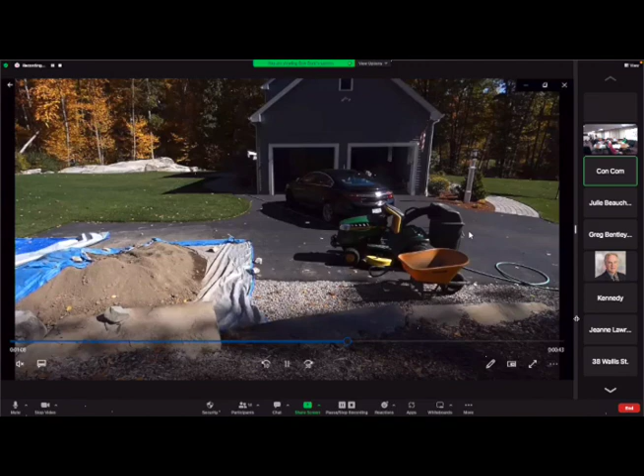I thought everything looked very well clean and neat and pretty much well established. Then I'm off the property, onto the other order of conditions on the left, and everything else is associated with this property here. So there's no variation in the plan, it's just that we were looking for more stuff to be done, and that stuff has been done now.

You have the trees, you planted the trees along the center line, very pretty. Some reground chips, a little riprap swell along the right hand side.

Any comments from the board? Looks good to me. So is that like another driveway that he was walking up, or what is it? Oh, okay. It's a double wide, it's like a boulevard. Yeah, it really is. The two-way, yeah.

They didn't want to share. They did not want to share, that's correct. Oh, okay. Didn't expect to be. Right.

All right, I'll entertain a motion to approve certificate of compliance.

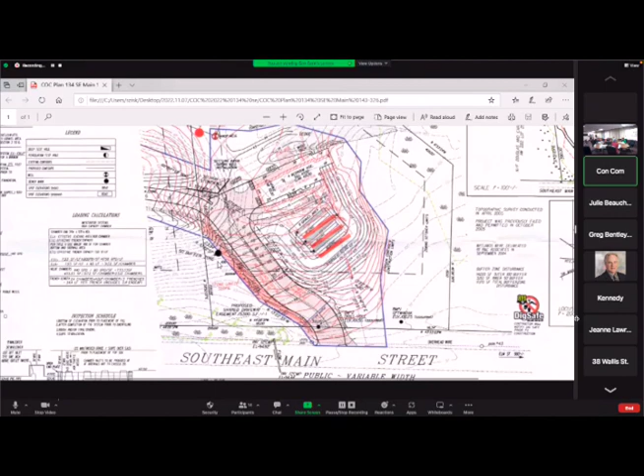So the propane tank though, the propane tank is shown to be on this property. And that is beyond what was, I think, proposed as the construction limits. It is outside the construction limits. They just plopped it there.

Which, you know, is still outside of 50 feet, it looks like. So not a really big deal, but... Yeah, and I couldn't remember whether we discussed that last time we looked at this plan or not.

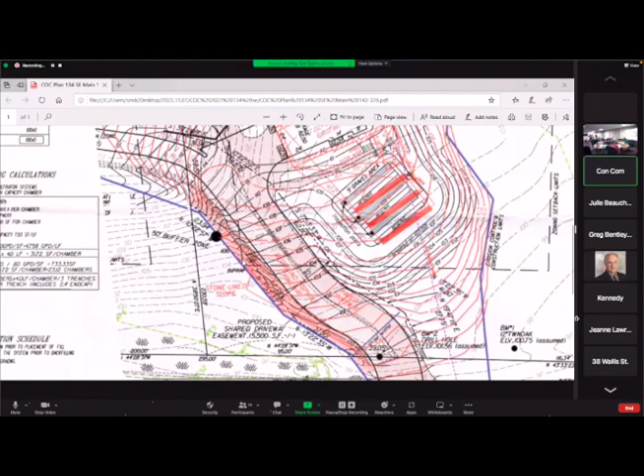But the driveway looks good, so. I'm fine with it. Looks fine with it, good. I'm fine with it. No, it's worth asking, absolutely.

Continuing to entertain a motion. I move that we approve the certificate of compliance request for 134 Southeast Main Street.

Motion made by Mark, seconded by Mike. Roll call vote. Eric Harris, aye. Joe Fitzpatrick, aye. Mike Greco, aye. Mark Mangum, aye. All right, thank you.

Next item 7 is request for certificate of compliance for 149 Southeast Main Street, Dave McKenzie. Is there someone representing that address? Excellent, yes it is, thank you.

Is this good right here? Beautiful. Okay.

For the record, Margaret Bacon, Civil Site Engineering, requesting a certificate of compliance for a wetland crossing for our client, Mr. McKenzie, at 149 Southeast Main Street. I don't know if the board had a chance to get out there and take a look at this, or Steve, you want to bring up a video?

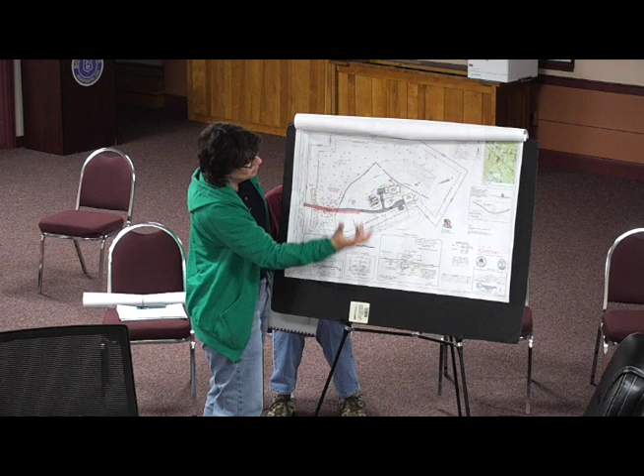Yeah, sure. Okay, so basically, this was a wetland crossing we did a couple years ago. Site is stable, everything was installed pretty much exactly how it's supposed to be. Culverts, elevation and location, dead on. The replication area is growing and seems to be thriving. Here in red is the as-built driveway, and then there was the proposed driveway. The area up here is outside of the buffer zone, but the house is pretty much as designed.

And then the two replication areas. Actually, I had to replicate 2,400 square feet. So instead of disturbing a whole big area, I tried to keep the disturbance adjacent to the driveway. I kind of split it into part here and then another smaller replication over on this side.

When was it planted? Over 2 years ago. And the plant material looks good? Oh, absolutely. Actually, I did all the planting several years ago. Usually about 50% of those plants will survive, but what you really want is the native plants to come in, and a lot of the plants we planted are coming in quite healthy, including some arrowwood and winterberry.

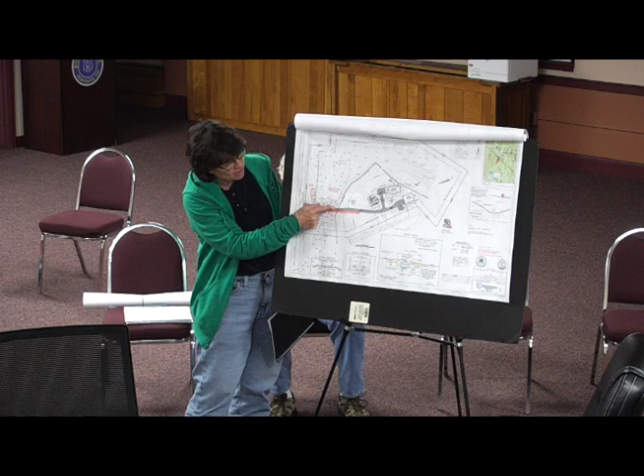But what we also did on this driveway crossing is, instead of doing 2-to-1 slopes with rock or walls, we vegetated it. We used a lot of willow tubelings - I don't know if you've ever seen those, they just insert the willows in, and did a lot of willow plantings along the slopes. We also included a wetland hydro seed mix. I have some pictures in this report, and that stabilizes the slope instead of using a hard rock retaining wall and riprap. They're beautiful, actually. First time I used those tubelings, I was quite impressed, so I've got a couple other jobs in the works doing the same thing.

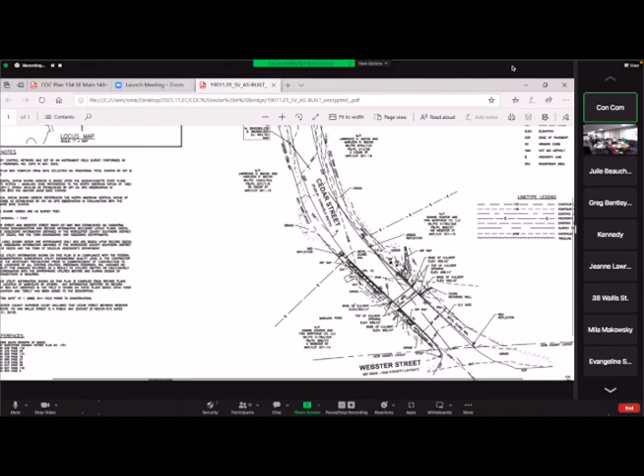Guess we have to approve it then. The file name says it's the as-built. You sure you're not in black and white? Can you see it on the screen? Yes, that is the thing that I am looking at.

Look at you. Jim, are you there? I'm relatively certain that Jim is not here. I see him on the Zoom. Oh. Apologies, he's muted.

He is up there, come on Jim. Does Jim know, is he up there? Yeah, I see him. Can you hear me now? Yes. I apologize, every time I use Zoom, the first time I log on, nobody can hear me. I have to log off and log back on, and I apologize for that.

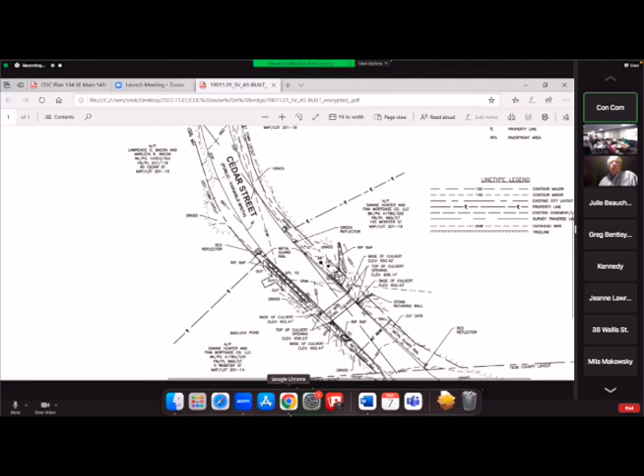Do you want to talk about the bridge and the asphalt, any variances? Yeah, I did hear the first part of that conversation. The contractor was installing 4 bounds, and there's 3 punch list items, none of which entail working outside the bridge. So those are the people you probably saw, the surveyors installing the bounds along the layout.

We're having the contractor also install washers on the guardrail that goes across the bridge, so that's probably some of the work you've seen. And there's a couple of signs further on north that they have to adjust. So those are the 3 punch list items, and I'm sure that's what they were out there for.

Yeah, other than that, the bridge is now complete. They did great work out there, and we're requesting the certificate of compliance. We did have the original order of conditions.

490 square feet of temporary wetland impact that, if you've been out there, the wetland species, especially on the west side, they're starting to, they're growing. The northwest side has really good vegetation.

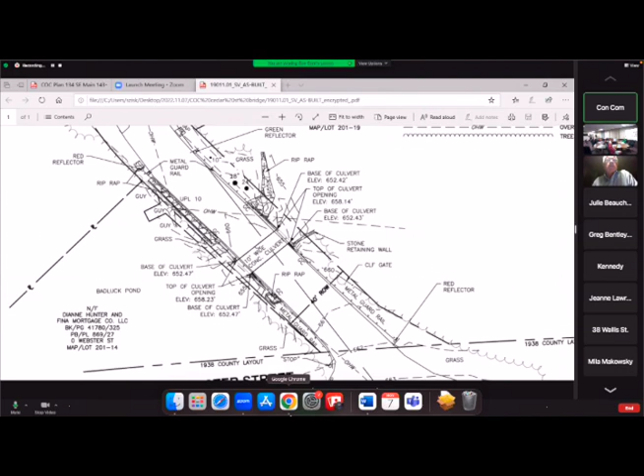The southwest side is coming in too, and then the other side. Did you have a video on? Is my video coming up on this at all? No, we just see the plan, a black and white plan. For some reason the videos will not... I had a few pictures, but with my ability on Zoom, it's hard enough to get the audio to work. The videos, it's not having me share any videos tonight. Let's see if I can try it one more time.

You're getting it, is this video coming up? Yes, yep, okay, oh very nice. Jim, can you see the video at all? I can, yes, all right.

I think the replication temporary is on the other side, right, Jim? No, it was on this side, yeah, this is the northwest side. I had pictures from a couple of months ago from September which showed it really filling in green and all. It was on the northwest and the southwest side, so the sides you were just on. This side here, we just had the bank of the river.

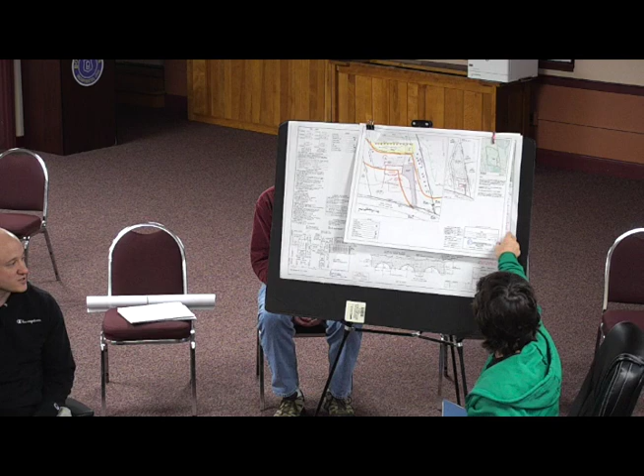Then he wanted to do some additional work, and he contracted a landscaper. I'll let him explain what happened, but he tried to do everything the right way, and he was kind of misled. So we ended up with a situation where there was some additional work done that was not permitted. Andrew, I'll let you briefly explain what happened.

Sure. So it all started back in April. We had a thunderstorm earlier in the year, and there was a tree that broke that was leaning right up against the house, caught up on another tree. So we had a tree guy come in to do emergency services to remove it before it fell on the house. In removing that broken limb, we got into a conversation - the gentleman's name was Josh King.

I mentioned to him, hey, we were thinking about maybe expanding our lawn, but we know we have wetlands in the backyard. Josh said, yeah, I can do this, we'll get the board's approval, we'll go in front of the commission, no problem. That was a complete lie.

We were conned by this arborist. What ended up happening was at the end of the project, I was the one who reached out to Steve, and I said, Steve, I've been working with Josh King. Steve says to me, I have no idea who Josh King is. I said, Steve, I can't even imagine that's true - I have not heard from Josh King since that conversation. Actually, the original text message references Steve Zisk's name - he said to me, Steve was out here, we did a video chat with the board, all got approved. And obviously, that wasn't what ended up happening.

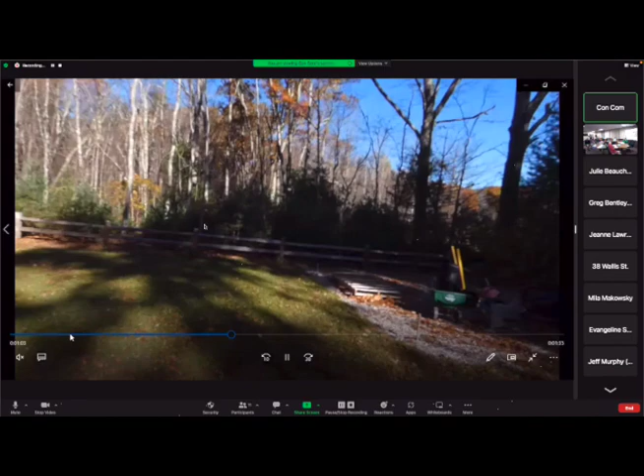This video shows what's there currently. Steve was here last weekend. See the well? Oh yeah, I did. So you can use that as a reference. There's the well, that's where the old fence line was. The old fence line basically went to where the front of the shed pad is laid out as well.

The logs in that pile are mostly from the dead tree you were talking about, the broken tree that was leaning towards the house. Yes, that tree is in there. So that was a pretty good sized tree. Several pretty good sized trees. So we're thinking there are multiple larger trees in this area. Yes.

What I'm thinking, and I want to hear what the board thinks as well, is that I would really like to see a planting of another shade-providing tree in that area, but I also want to respect that it's close to your house, which was the reason you had to remove the tree that was there.

So we're definitely open to putting some of the trees back. Yeah, I want to get shade back over that wetlands area because that sunlight coming through is going to be incredibly damaging to that resource area, whether it be behind the fence or in front of the fence. It would have to be in front of the fence, unfortunately, because your fence is right on the line right now. Okay, that would be okay.

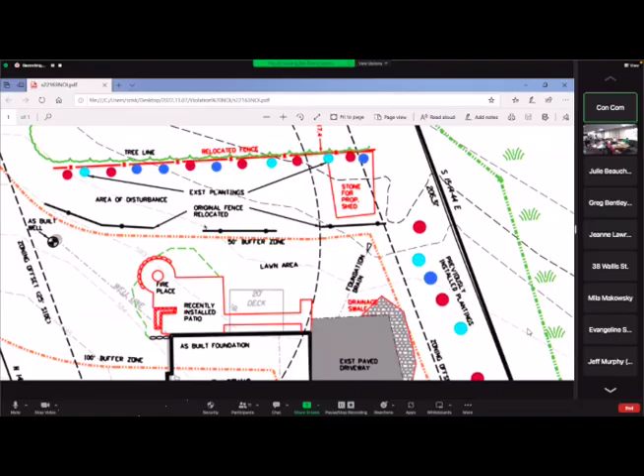Okay, anything else, board? They've got the shrubs in there that were in the original plan, so. They all survived as well. They were planted in November, so that's why they were easy to move.

I was out there, I was like, what am I looking at? Look at something that looks like it got approved.

Well, it was a mirror image of what I just went out and saw about 6 months earlier. I could not believe the guy did what he did. It looked almost exactly, you would never have known what he did.

Credit to the homeowner for calling it out. Thank you.

Like Margaret said, we were trying to do it right from the get-go. No, absolutely. And it's really an unfortunate situation, but we're happy to readjust the shed pad and make this okay.

So yeah, board, I've got in here that the path and the shed have to be at least 34 feet from the wetlands. There will be 6 red maples added somewhere in the yellow highlighted area with the recommendation at least one of them be behind the shed.

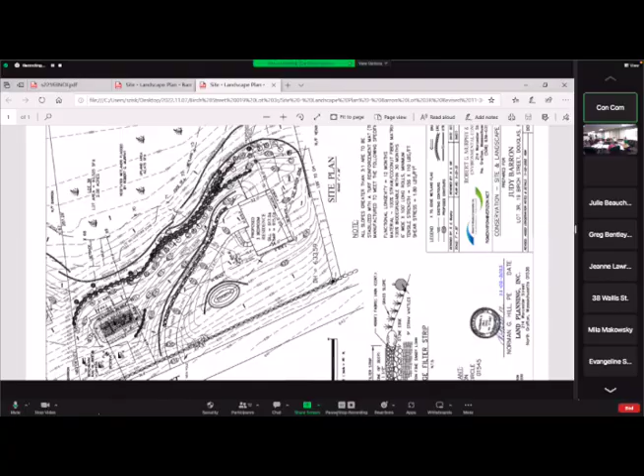Whoa, because the driveway is raised so high, you're creating quite a valley on the road. It's like a valley on the upper side, and the idea is to have that go down across the driveway before it gets to the house. You'll see what happens along the upper portion—it's fairly steep because that's where the deepest fill is going to be. As you get down toward the house, it's not all that steep, but the intention is to have the flow come down a vegetated slope along the driveway and then cross the driveway. That's just the reality of having a driveway on the side of a hill.

Again, if you look at the other side of the driveway, you'll see that—is there any filter strip opportunity or any benefit to maybe doing some infiltration on the uphill side, like where it says walk, in that area, or just above that walk, or somewhere in that area?

Well, I just get concerned when I see that amount of sheet flow coming across the driveway, and it gets to the other side, and it's going to want to dig in on the downhill side of the driveway. We could do the same thing—we could add a filter strip on both sides of the driveway, going all the way down toward the walk. The filter strip infiltrates the water, slows it down with the stone, but it also has sand below it, and it goes into the subsoil, so it infiltrates the water.

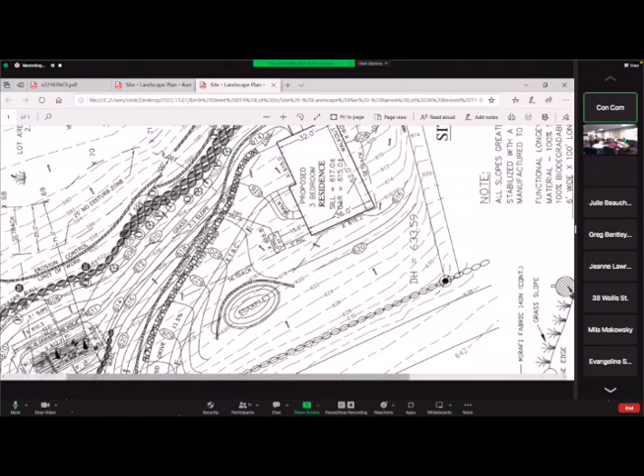Again, where we have neighbors on either side across the street and septic systems, we have to be 100 feet away from all the septics. So that's what kind of pushed the well over in that area.

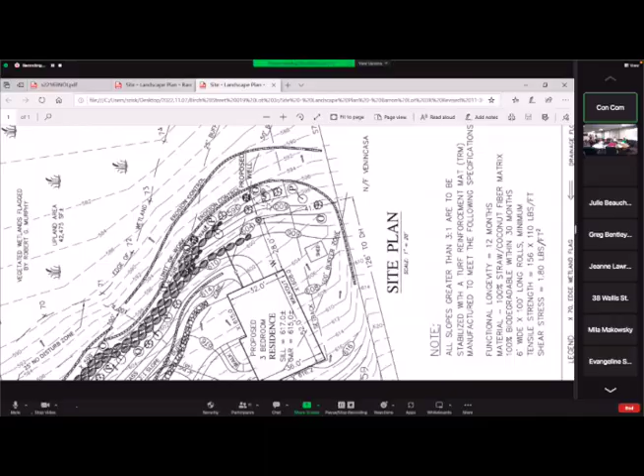One note I might make is that the abutting lot to the south, Venincasa, shown right essentially where it says site plan - that lot has a huge amount of fill that's been kind of dumped on it. It's got railroad ties and tires and a lot of junk. We're going to work with the neighbor there to clean that area up because it goes over the property line; the fill is on my client's property. So we're going to work that out so we can get the fill from their site to blend in with the fill from our site, and then we're going to take all the junk out of it. There's a lot of, it looks like an old farm, just a lot of old junk. We can look at it on the site walk - you'll see it on the far end. That's all going to be removed.

Excellent. And again, as far as landscaping, you can see on this plan there's a lot of shrubs and trees and things brought in.

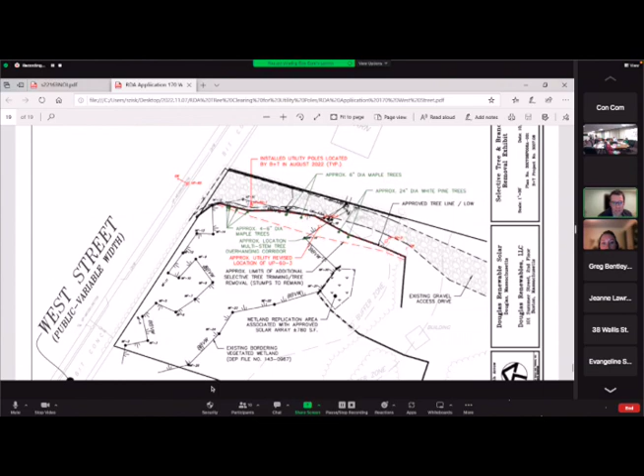Oh, there we go. Yep, so this might clarify what we were explaining. Shown in red are the locations of the utility poles that were installed. The dark black lines, on the lower side which is the west side of the driveway, was the approved limit of work line. And the green circles are the approximate locations of the trees we anticipate needing to be removed to provide the 10-foot corridor from the utility poles.

So the 2 large white pines we were talking about are located just to the right of wetland flag 18 and the culvert that goes under the driveway, which is the area Steve was describing. There's a little spring or something coming out from that barn, the rectangle to the upper part of the plan, and we installed a culvert to maintain that connection, with the BVW on the lower side. Approximately a handful of 4 to 6 inch diameter red maples closer to the street are the ones actually within the BVW. Again, the trees would be removed and not stumped, so they'd just cut them so there's no disturbance to the ground itself.

So now that I see the plan, I see that a utility pole was actually installed within the wetland. Is that correct?

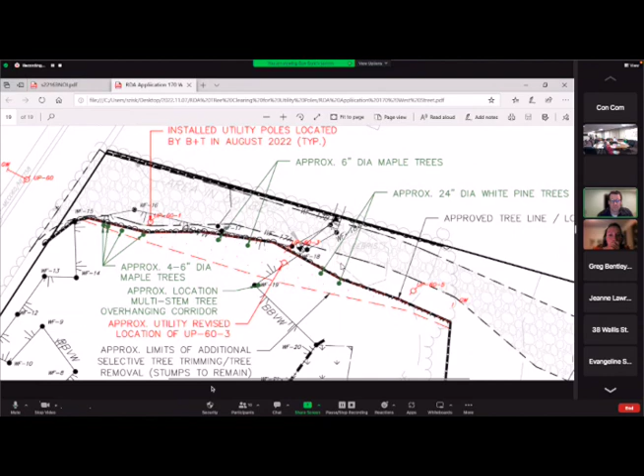So you said they tried to put it closer to the driveway, but they didn't or couldn't? Well, they initially installed it closer to the driveway and then subsequently moved it. I don't have the specific reason why, other than maybe they thought it wasn't a straight enough line of poles. Oh yeah, an electrical engineer meets a civil engineer. Yeah, it doesn't seem like it would be offset any more than it already is right now - I mean, they're not in a straight line at the moment, so. Fair.

Would National Grid allow for any plant material underneath the power lines? The reason I'm asking is, trees obviously you can't do, but something like low bush blueberry shrubs - would that be possible to plant within that area, under the power lines? I would think that if it didn't grow too tall, something that wouldn't grow high enough to present any sort of hazard to the overhead wires, would be in the realm of possibility. Okay.

So you said the solid black line was the limit of work line as proposed? Correct, yeah, that solid black line. Was the original plan or notice of intent, did it show the power poles?

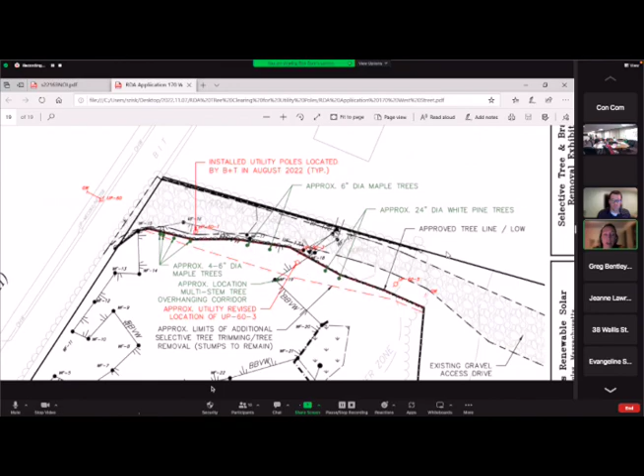So they can go ahead and continue. Yep, they don't have to wait. If you have your equipment coming in sooner than that, then do the work. Great, thank you very much. Thank you, yep, welcome.

Sure, I understand that, but a positive RDA means that we think there is an impact, and then they need to respond accordingly. Right, but they don't need to refile because they have an open order, they need to edit the existing order. Okay, that was the whole issue. If their other order had been closed with a certificate, they would have had to do this new filing, but they had an open order that we want them to edit.

Because of the pandemic, they extended it, what, 20 months? Yes, something like that. And they're still doing work on that order. Yeah, right, the project's under. All right, so.

Old business, number 14, 7 PM, public hearing continued for DEP 1430914, this is Shore Road. We have some letters, but since we don't have representation from the parties involved, we can review those. But I thought we were going to push the discussion.